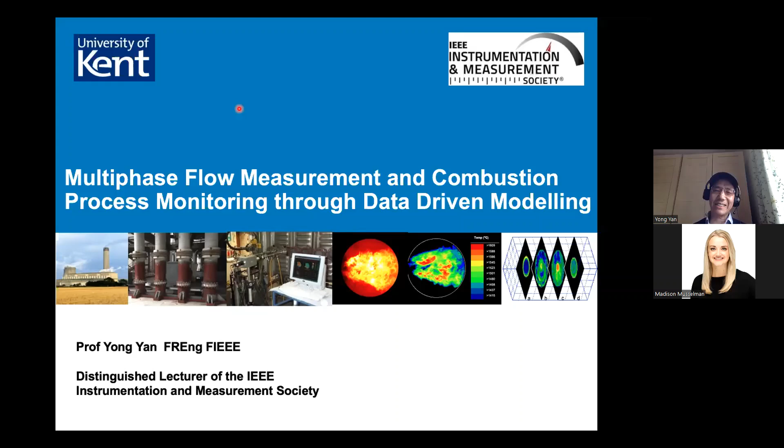Part of that program, I'm asked to speak. The topic is about multiphase flow measurement and combustion process monitoring through data-driven modeling. I would like to share my experience with all of you in conducting research here using this technology.

Now, in the next 40 minutes, I will introduce the basic methodology: how do we use data-driven modeling to achieve measurement and monitoring. I'll use an example I'm quite familiar with, multiphase flow measurement. This measurement is quite difficult, there's no simple solution. Hence, data-driven modeling may offer an approach.

In the meantime, I will also introduce other applications such as leakage detection, and how we predict NOx emissions from combustion processes.

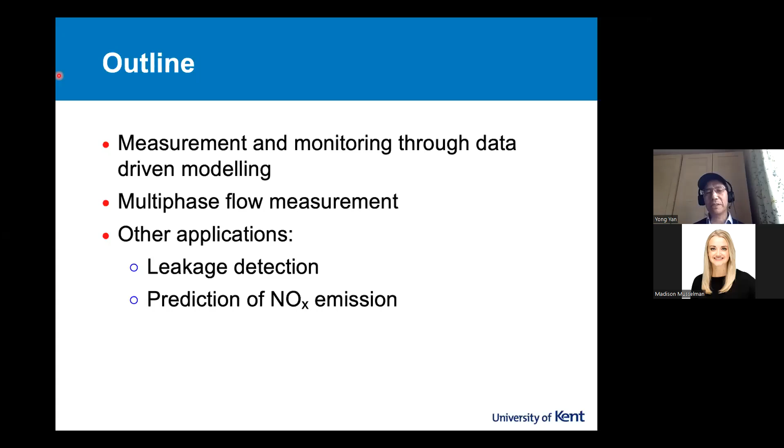Artificial intelligence has impact in many areas of our life and work. So we do research and development in instrumentation measurement, and artificial intelligence obviously has had impact in this area as well.

There's a review article published two years ago in the IEEE Instrumentation Measurement magazine. I extracted this image, as you can see. They call it applied AI methods, which are used across instrumentation measurement in a diverse range of applications. As you can see, people use different terms, but they mean more or less the same thing: various machine learning, deep learning, or evolutionary computation. There's a lot of terms here, and they are related one way or another, in how AI is applied in instrumentation measurement.

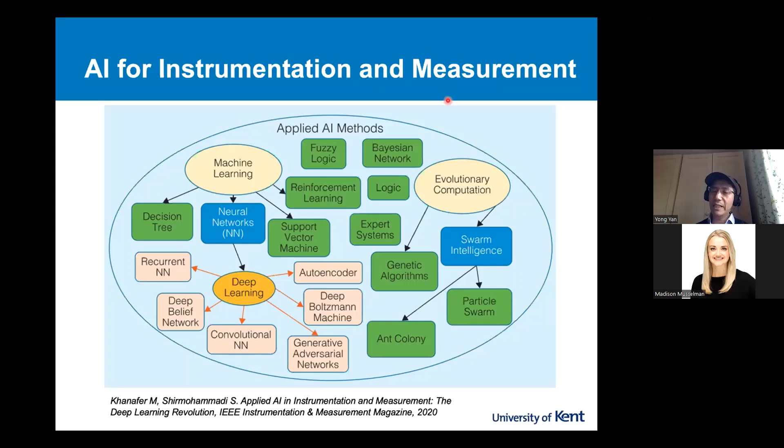So in this topic, I will introduce how AI affected or helped us achieve measurement in multiphase flow metering. To start with, I'd like to introduce this important area of application. It's called

air-oil two-phase flow metering. When we talk about flow, normally it's single phase. Here on this occasion, I'm talking about two-phase. The two-phase here means air-oil. So what is that we're talking about here?

You can see the image here, something you may see if you cross the ferry. You will see a so-called bunker barge. In fact, it's an oil tank which supplies fuel for a ferry, like this on the right. So on the left, the barge is a seller. On the right, the vessel is a buyer of marine fuels.

Okay, so it's oil. The trouble is when you start the so-called filling process—they don't call it filling, they call it bunkering—when you start the process, very often you get air into the system. So throughout this whole bunkering process, there are a lot of chances you get air into the oil, but customers are buying oil, not air bubbles. That's how the bunkering process creates a lot of uncertainties in measurement.

If you look at the diagram on the right-hand side, the seller has a flow meter, the buyer also has a flow meter. Each flow meter tells you how much you receive or you sell. In fact, we have two receipts, one from the buyer, one from the seller. The two receipts are never the same. There's always debate, a dispute. There are some high-profile legal cases in the marine industry.

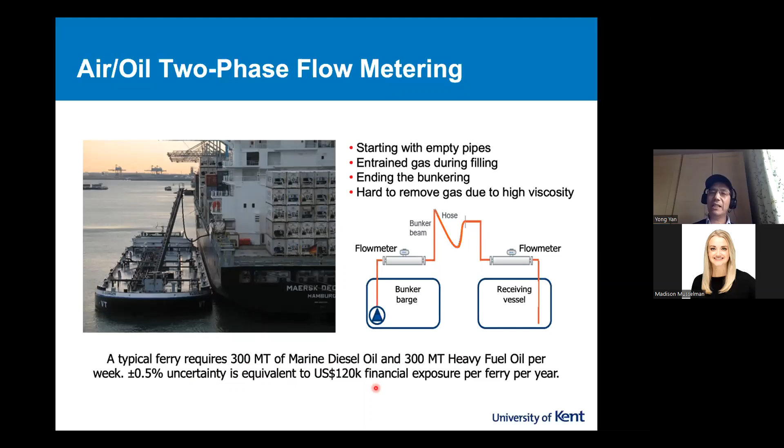So we need to monitor or measure oil flow rate accurately. Here's an example to demonstrate what happened during a bunkering process. The whole process is roughly 1.5 hours. The blue line is the flow rate in kilogram per hour. You see it's steady most of the time, but initially it's uncertain, and during the ending period you can see it go up and down.

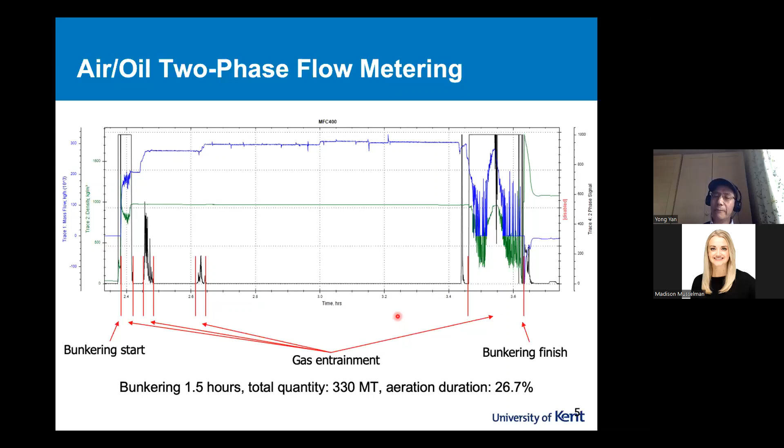The green one is density of oil. It's constant most of the time, but at the beginning and end you can see it's uncertain because air gets into it. The black line indicates air has gotten into the system. In fact, you got 26.7% duration which has air bubbles getting into the system. So the customer is buying oil, not air. So how do we measure oil in mass accurately? It's a challenge. How do you monitor oil accurately in the presence of air bubbles? Ideally, we want to measure mass flow rate, hence total mass.

But most proven flow measurement techniques provide volumetric flow rate, not mass. There are proven flow meters on the market which are based on radiological and nuclear magnetic resonance principles. They're very expensive and not accessible, certainly not suitable for wide uses across marine or similar sectors.

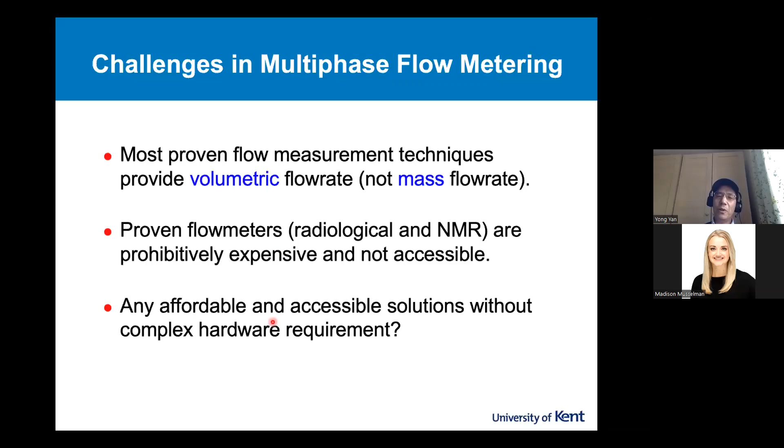So here's a question. Are there any affordable, accessible solutions? Without complex hardware means it has to be cheap enough so people can afford. So what's the option here? And we say, yeah, let's try data-driven modeling, soft computing or machine learning, more or less the same thing here. So we did a quick survey in 2018, that's 4 years ago, and we did a quick search here.

There are a lot of research activities going on in the academic community and industrial sectors. You can see on the left, all sorts of sensors have been used. They're quite cheap, well established, and you can see the methods they used for the data-driven modeling. Mostly artificial neural network, SVM, plus some other more complex ones. And the target you can see: air-oil, quite common, air-water, and so on, even gas-solid.

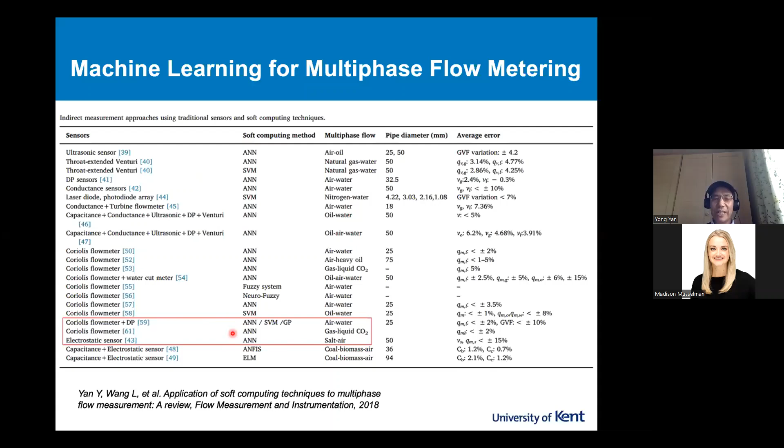And this red box here indicates the papers we published. So my team has been working on this over the past few years, so we have some experience. So our approach is to use Coriolis flow meters to measure two-phase flow. In other words, oil which has air bubbles. How does it work?

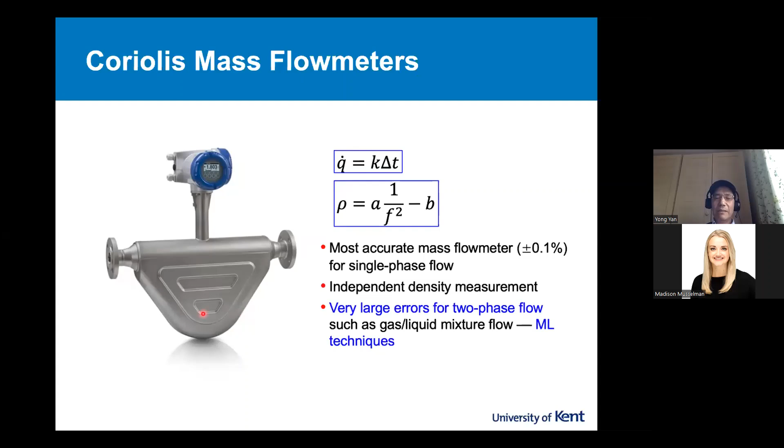If you have any idea about the Coriolis flow meter, it's quite straightforward. The flow comes into the flow tube. The flow tubes are vibrating due to the excitation of the two metal pieces here through control modules. We have upstream and downstream sensors to pick up the signals. Between the two signals there's a phase shift, delta t. From the delta t, we can work out mass flow rate, Q dot. Here it's mass flow rate, not volumetric flow rate.

In the meantime, we can monitor the oscillation frequency of the tubes. The frequency F can be used to determine density of the liquid. Now, this works very well for single phase flow measurement, I mean single phase oil or just gas, within plus minus 0.1% or even better. So it's independent density measurement, that's also helpful.

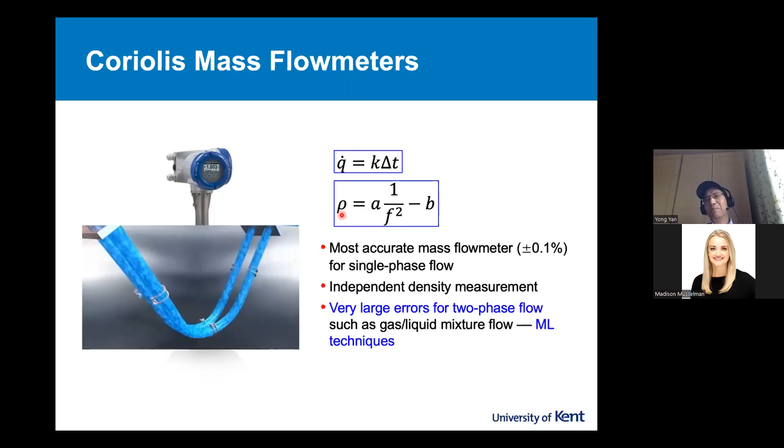The trouble is in real life, in this case, oil has air bubbles. It's air-oil two-phase flow, and the errors you get from the meters are very large. You still get the reading of mass flow rate and the density, but they have very large errors. And the question is, can we somehow minimize errors by applying data-driven modeling techniques without modifying the hardware? Because if you modify the hardware, it costs you money, has manufacturing implications, and will likely increase maintenance requirements.

So the idea is like this. We still get the so-called apparent mass flow rate and the density. We know they are not right, but we have that input anyway. The information is there. We also have temperature, which is embedded in the Coriolis flow meter. We can also include a conventional differential pressure transmitter. It is commonly available, it's not expensive. And that's it. We have data coming into data-driven models.

So it goes through the modeling process. We can predict mass flow rate, hopefully the correct one, a fairly accurate one, and hence the total mass. In addition to the measurement, we also have flow information such as density, even gas volume fraction, so how much air bubbles are in the oil, even impurities in the fluid.

So the trouble is when you have a model built offline, then you use it for online in situ continuous measurement. So ideally we need to do in situ training from time to time to enhance the performance of data-driven models, which were established before we do the installation.

In our case, we are also developing analytical models of gas-liquid two-phase flow. This information can be incorporated in the modeling, again to enhance performance of data-driven models. So this is the whole methodology, how we deploy data-driven modeling techniques to achieve gas-liquid flow measurement.

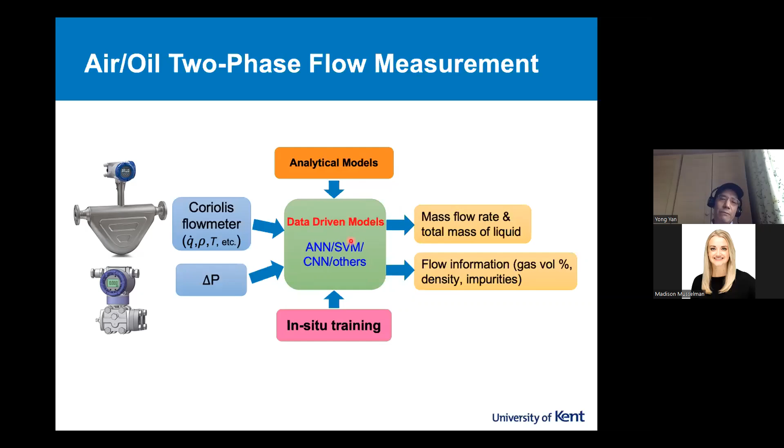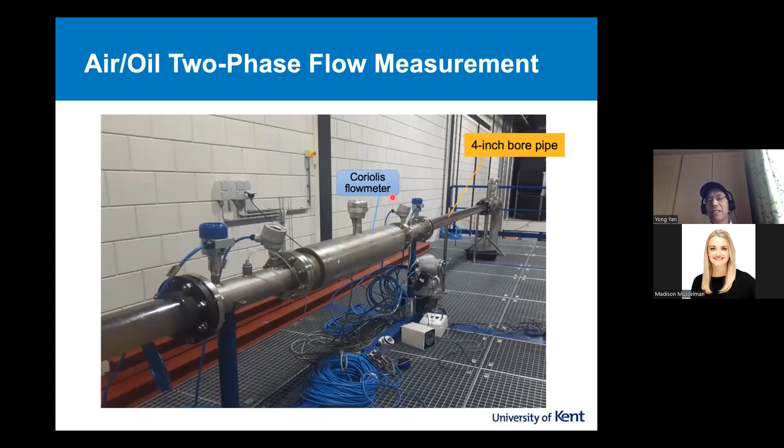This video shows you, if we do have air bubbles in oil, what happens. So you've got a very long and large air bubble, and we have tiny ones. We are not interested in this distribution. We want to measure accurately the mass flow rate of oil. So we have done a lot of work in this.

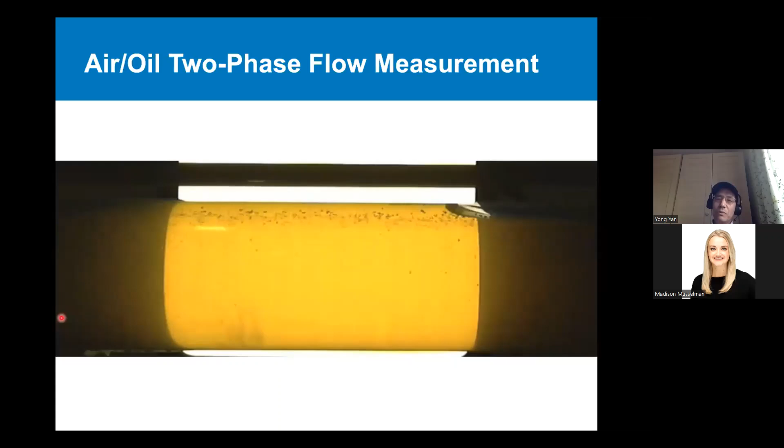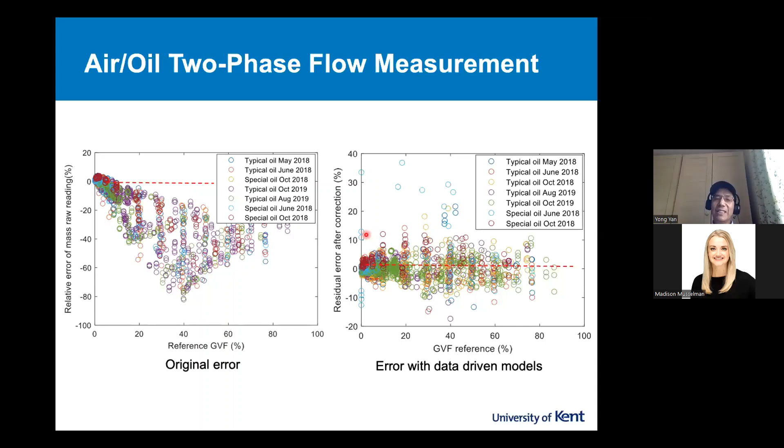Okay, so we have tested the systems with different oils, typical oils, special oils. For commercial reasons, I'm not able to tell you what oil exactly. Okay, but the message is there. So the data-driven models have helped us to improve the accuracy of oil flow measurement in the presence of air.

So tests with oil are always costly, inconvenient, sometimes even high risk. We often do research with air-water flow. You can see in the horizontal pipe and vertical pipe situations, without deploying the established data-driven models, again, you get the mass flow rate either under-reading or over-reading. It depends on the liquid flow rate, and also depends on the volume fraction, so how much air is in the liquid.

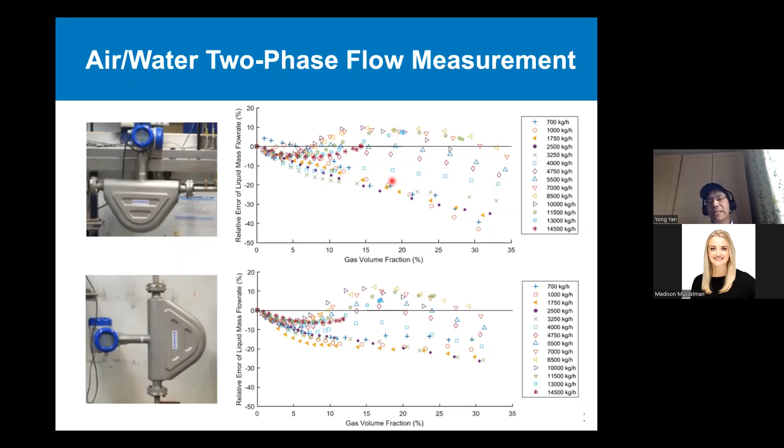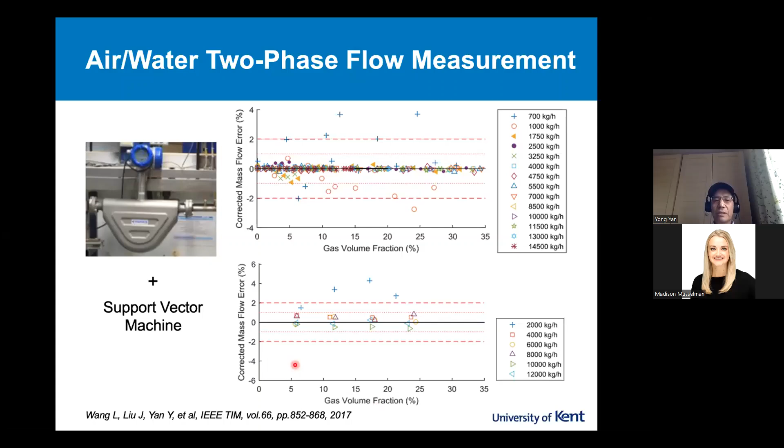Okay, we published results in this paper 5 years ago. If you are interested, you can refer to this paper.

Let's move to an entirely different sector. This is carbon capture and storage. Okay, CCS. Carbon capture and storage has become increasingly important because we're trying to minimize harmful emissions of CO2 to the atmosphere. We want to capture CO2, as you can see in the diagram. After capture, you transport CO2, hopefully in liquid form, towards the storage site, which is a depleted oil or gas field. So we hope CO2 stays there for whatever years, then that's it. So that's the whole idea.

The trouble is the CO2 in a transportation pipeline could be in gas form, in other words, gas CO2, could be liquid, could be a gas-liquid two-phase mixture, or even supercritical form. So the CO2 flow itself depends on the temperature and pressure of the transportation pipeline. So for all the good reasons, we need to measure the mass flow rate of CO2. This is mass flow rate, okay, not gas phase. So again, for trading, for accounting, for regulation purposes.

So here's an example. Imagine there's a power plant which emits 20 million tons of CO2 per year. A 1% uncertainty can result in 20 million euros financial exposure. CO2 costs have gone up a lot over the past few years. It's roughly almost 100 euros per ton. This is February this year. So that makes CO2 flow metering more worthwhile, because of the demand.

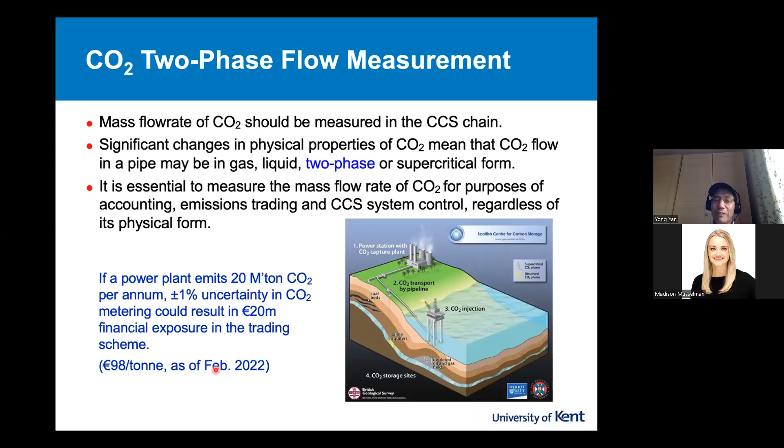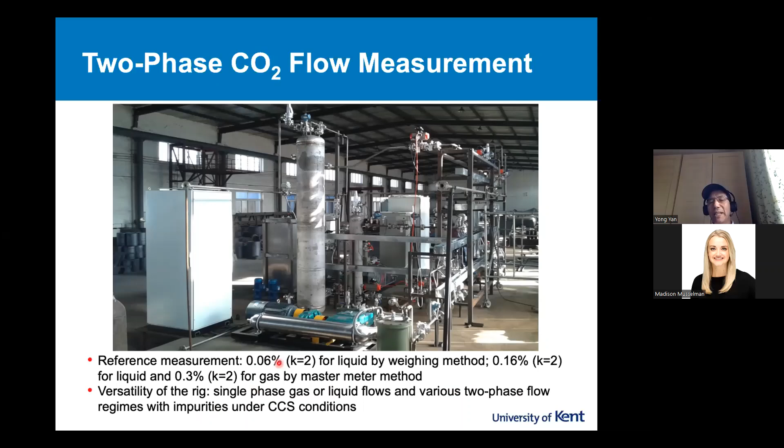The trouble with CO2 flow measurement under CCS conditions is that we need a platform. To establish such a platform is not easy. We spent a lot of energy and money to build this. So this is a 1-inch CO2 flow test platform under CCS conditions. On this test rig, you can create gas CO2, liquid CO2, or gas-liquid two-phase CO2. We can even add impurities into the system to test the impact of impurities on the flow measurement and so on. We have a weighing method to offer a quite accurate reference for flow meters under test. We also have master meters, again, for evaluation purposes. So this should give you some idea.

I have a video clip to show, just a moment, if I can show that. You can see the last one.

The idea is very simple. So we fix, more or less, the gas volume fraction, the same quantity of gas CO2. Then we change the flow rate. So it's two-phase. You can see the bubbles here on the top, at low flow rate. Then it's partially stratified. Then fully turbulent flow. Again, this shows you what happens in CO2 flow pipelines, the flow regime in this horizontal pipe. Again, we want to measure mass flow rate without actually quantifying the exact flow patterns.

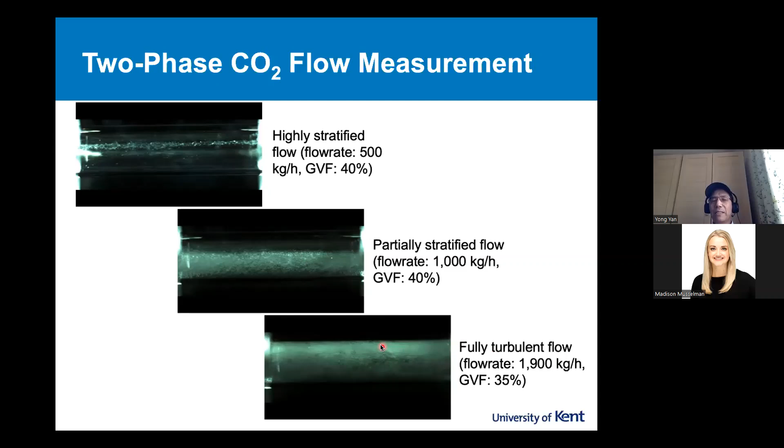So here's the setup. This is the Coriolis flow meter under test. This is the weighing column, which offers our reference. Okay, so that's that.

This is the test we conducted on the vertical test section. On the left are the errors of mass flow rate from the Coriolis flow meter without the data-driven models. On the right-hand side, after applying the models, the errors are much smaller, mostly within plus/minus 1.5%. This error is quite acceptable to the CCS industry. We can also measure gas volume fraction, within plus/minus 10%.

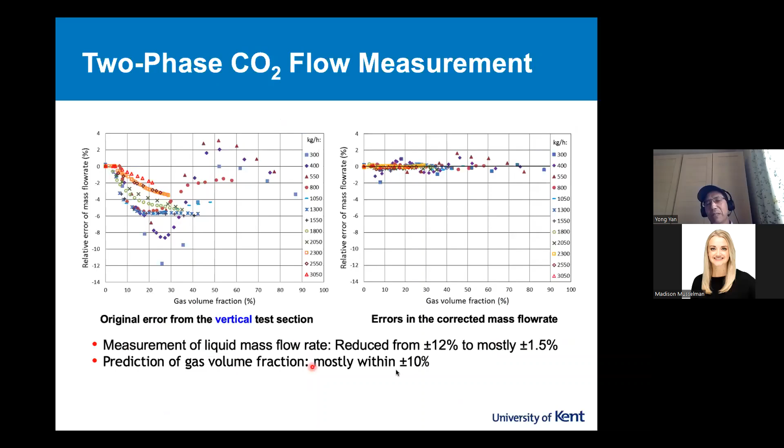So this is the vertical test section. For the horizontal one, it's similar. You can see in the original, the errors go all over the place. After data-driven modeling, we improved quite a lot. Again, in most cases, it's plus/minus 1.5%. We have published the results in this paper in the International Journal of Greenhouse Gas Control, three or 4 years ago.

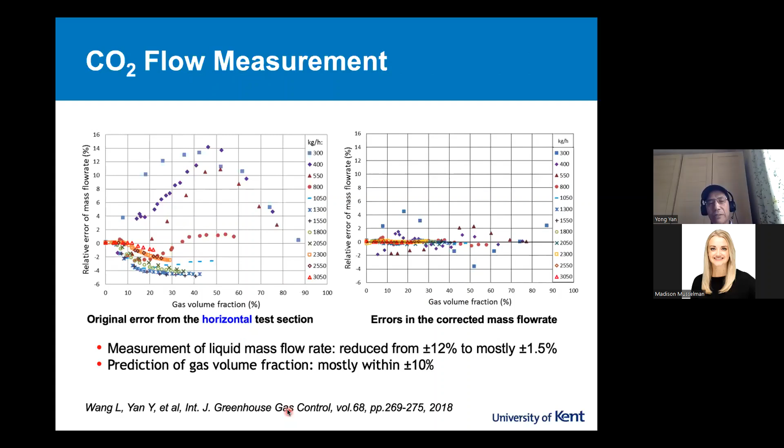I'm trying to show this video here. You can see it. Apologies, I'm not able to click the video clip here.

In fact, it shows a transient process during a startup of a CCS process. Initially it's gas phase CO2, then liquid CO2 comes from left to right. In the power industry, CCS is quite dynamic. The CO2 flow starts in gas form, then liquid, so you get a lot of transient processes. How do we monitor this? It's not easy. So that's the whole idea.

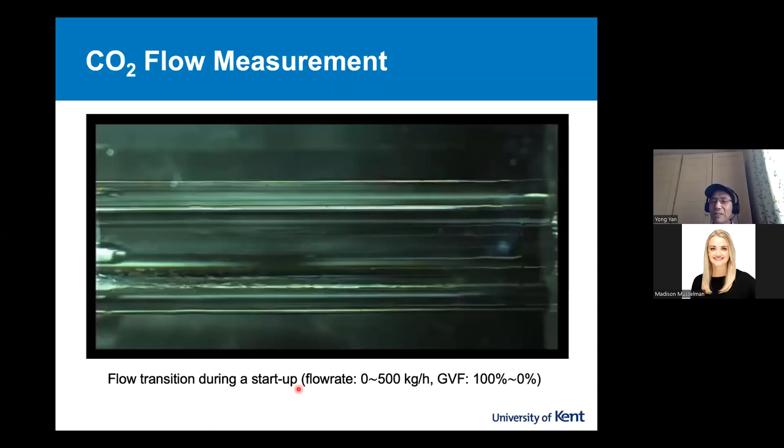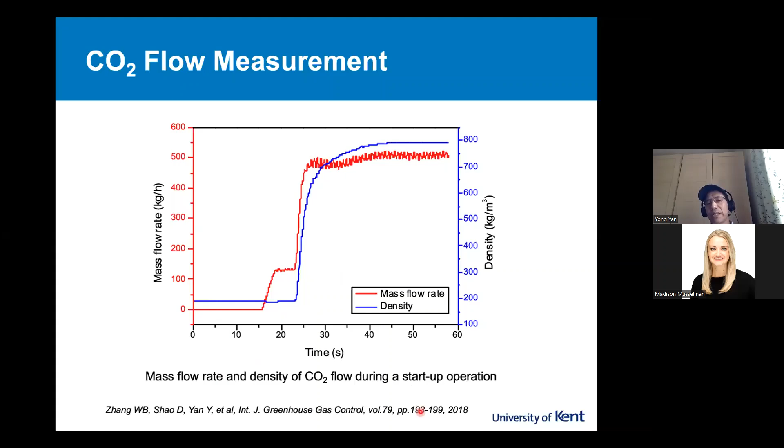I have that video clip; unfortunately, you can't see it. You can see the mass flow rate step increase, stage 1, step increase, stage 2, and the density change as well. So this is a transient process, and we want to monitor the flow rate of CO2 under such dynamic conditions. We have done a lot of tests and the results are quite encouraging. It's published work; if you are interested, you can refer to these publications.

Then we move to an entirely different sector: gas-solid, which we call air-solid flow measurement. In this pipe is a mixture of gas and solid. We want to measure the mass flow rate of solid, not air. So we use a circular electrode, which we call electrostatic sensors, and also curved electrodes; you can see the arrays. Plus a differential pressure transducer, because of the air in it, we want to know how the pressure changes in relation to flow conditions.

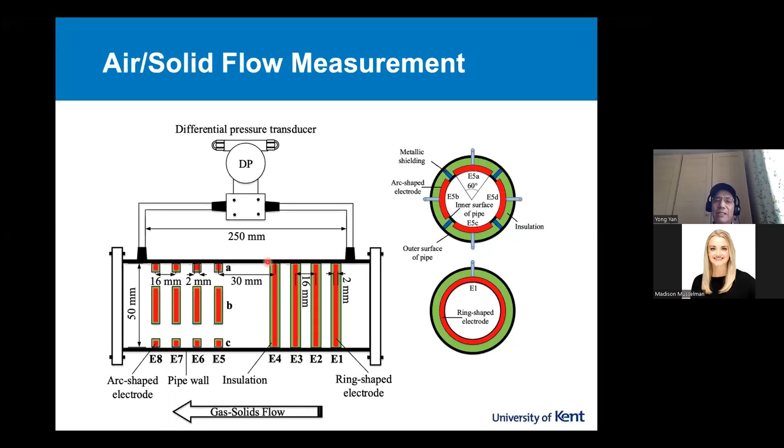The sensing unit is very different from other multiphase flows. We have a circular-shaped electrode, arc-shaped electrode, and differential pressure. Then we go through a signal processing stage, and deploy a neural network, support vector machine, and convolutional neural network to get the mass flow rate of solids. We have been doing this research for some years, all conventional, but we have attempted to use data-driven models to see if it's better.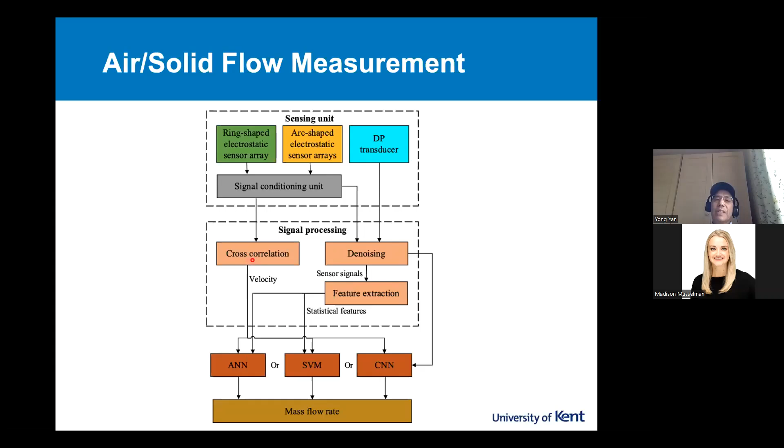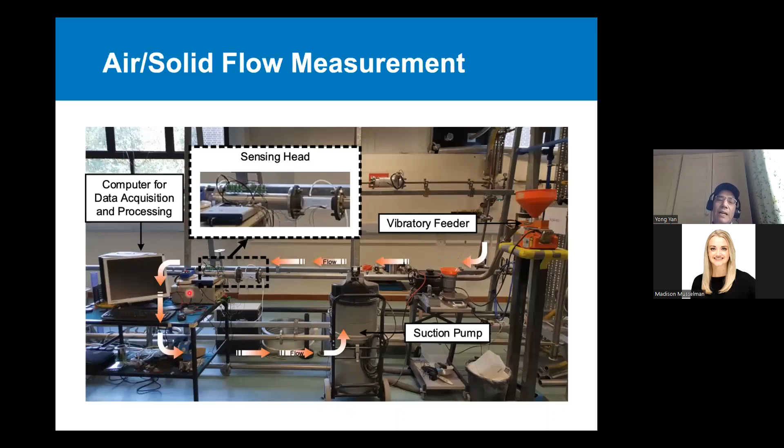This is a test rig in our lab. Particles come in from the right-hand side, go through the test section, eventually going to a suction pump. You can see the flow meter here; it's a 2-inch pipe. The electronics and computer are on the left-hand side. We have tried to use the SVM model and the CNN model. On this occasion, both are on the horizontal test section.

Details of results are published in this IEEE TIM paper; if you're interested, you can refer to that paper. We feel quite encouraged by the method. The hardware is already there. We have done a lot of traditional conventional research, but now we just add models, and the performance is indeed improved, to some extent.

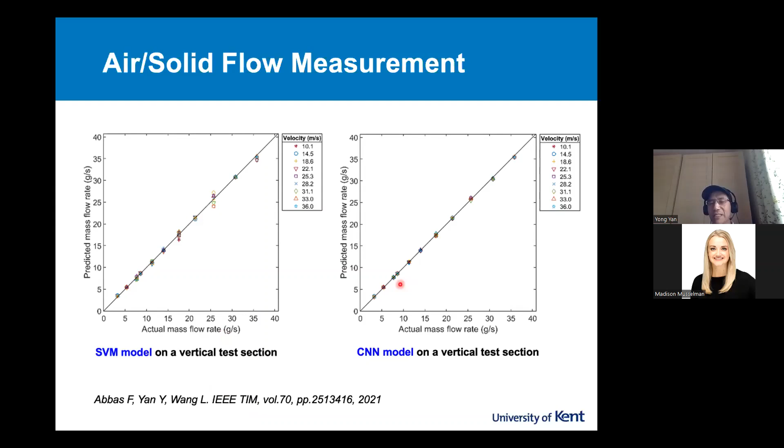The last bit is about leakage. It's difficult to capture CO2 from a process, then it goes through some 100 kilometers of transportation, and that CO2 could leak. So there's a demand: how do we detect any leakage, and what's the leakage rate? Sometimes the CO2 pipeline also has impurities, such as nitrogen. Do we know how much impurity is in it?

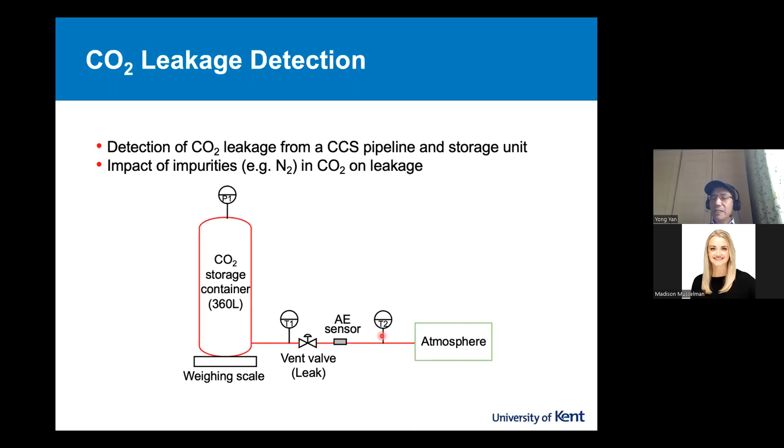Again, on the test rig presented earlier, we have this storage column. We can weigh the mass, so we have a reference of how much mass is lost per unit of time, a reference leakage rate. We have used acoustic emission sensors plus a thermometer to monitor the leak rate. Here's the reference column and the actual setup. You can see the low-cost acoustic emission sensor and a temperature sensor. And we can create different leak conditions.

We tested the methodology just like flow measurement. We deploy data-driven models and extract features from acoustic emission signals in the time domain and frequency domain. We also incorporate the temperature output, and all this information is combined as input to the data-driven models, so we can predict leak rate and even the volume fraction of impurities, if any.

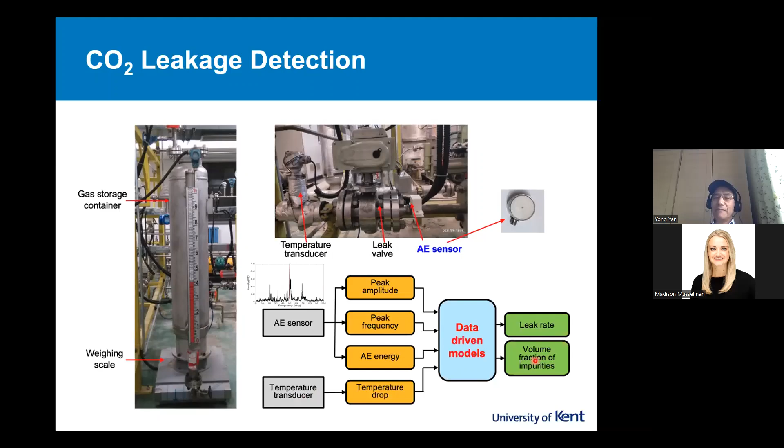Here's a typical result. Here you can see the measured leak rate. We have relative errors here. It's quite good, plus or minus 3% in most cases. We even achieved quite accurate prediction of nitrogen impurity volume. You can see again, it's surprisingly good. We are still working in this area, so the results are to be reported in future. We feel the potential is there.

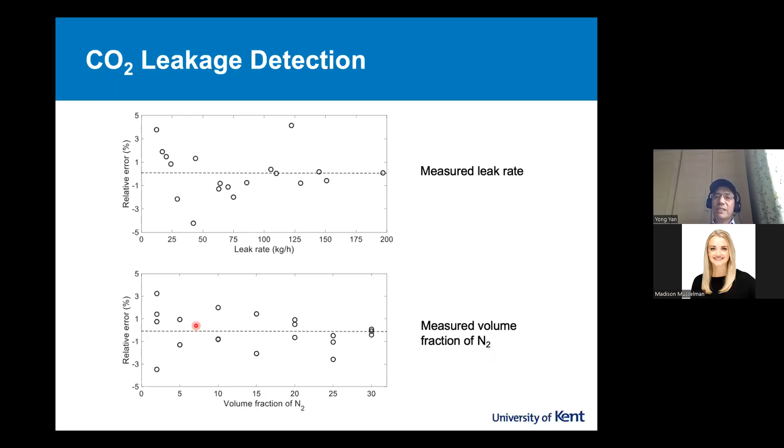The last bit is about how we use data-driven models to achieve combustion process monitoring. About 10 years ago, we started to try this approach. We have this EMCCD camera, you can see on the left, plus a spectrometer. Again, that's small, miniature and quite low cost. So we have this radical image from a combustion burner flame. We have flame temperature information from the spectrometer.

Again, we extract all the features. Then we feed such features into data-driven models. So we are able to predict a so-called equivalence ratio. This is an important indicator of the combustion quality. You can see it's quite a good prediction here. In the meantime, we can even predict NOx, how much NOx is emitted from the combustion process. Again, this is surprisingly good, with very basic data-driven models.

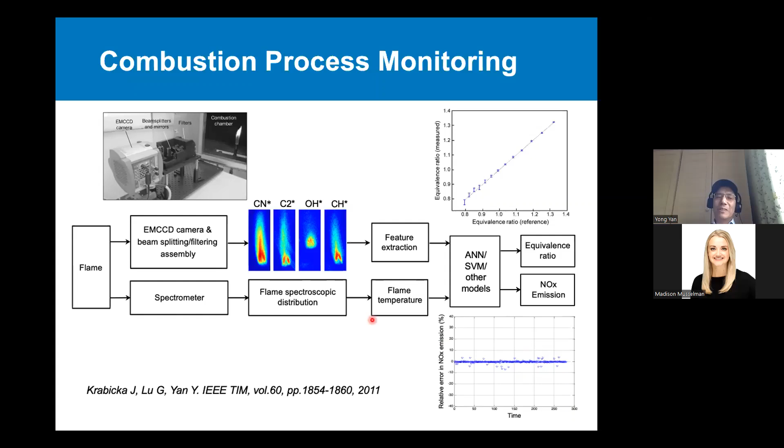So that's 10 years ago. And since then, we've worked on and on this. We're trying to improve the sensor and improve the data-driven models. In the past 2 or 3 years, we did a lot of tests on an industrial scale combustion test plant. It's quite large in scale, very difficult to do, and it costs a lot to do such tests. This is a downwards burner. The flame here is facing downwards. On this occasion, we have biomass fuel, and we have tried different fuels here.

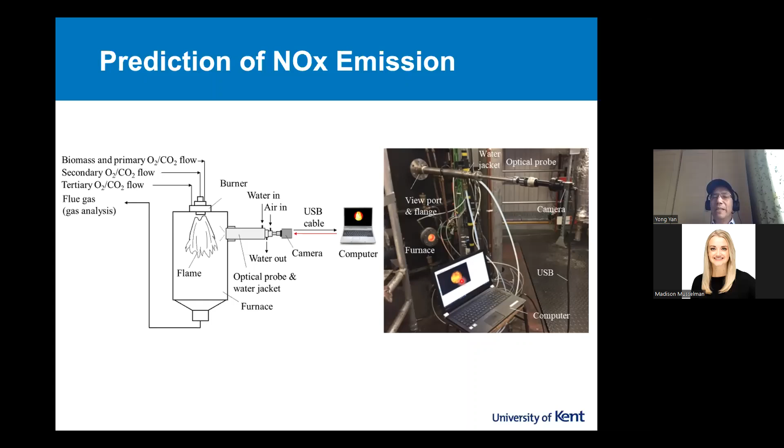So you have an imaging system, which gives us the images here. This imaging can be used to derive a lot of information for our measurement purposes. For example, from the images on the top, we can measure temperature profiles. The temperature profiles have a close correlation with NOx emissions. So once we have a temperature distribution, we feed such information into data-driven models. We use the data set we collected to train the model so we can predict NOx.

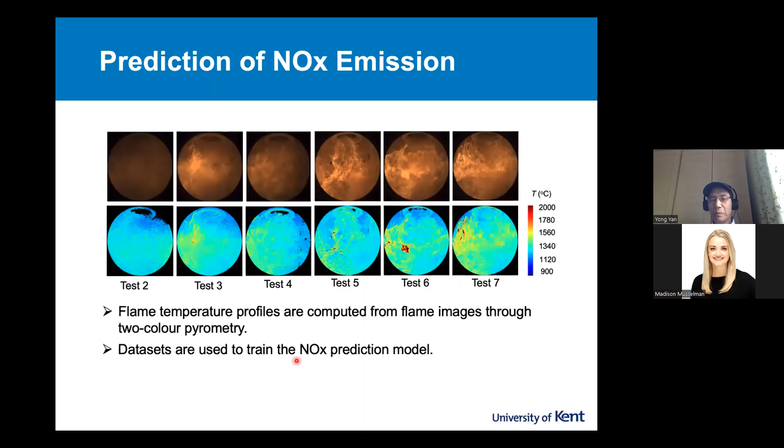So then most recently, we have made more progress applying so-called CNN models to achieve online deep learning performance. In other words, we don't just develop an offline model, we test it under online conditions. So our idea is to develop a model, and also retrain the model by incorporating new incoming data. So it's kind of like in situ training, constant improvement of the models we established earlier. This is important to maintain the performance of previously trained models under real combustion conditions.

So the data again we obtained is very encouraging. The details are published, again, in this TIM journal. Again, my time is limited here. So if you're interested to study this, this gives you some idea how we achieve so-called online deep learning by incorporating new data.

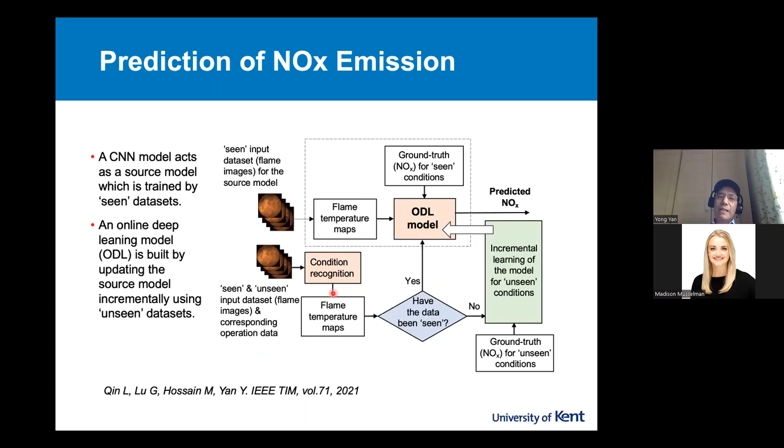Finally, we are working in the same area here. We're trying to deploy data-driven models across the whole combustion plant. Now, a conventional combustion plant produces electric power 24/7, non-stop. But now in the modern power industry, they have a very complex power grid, which has a lot of energy sources, conventional, renewables, with constant optimization. So the power plant has to be operated in a flexible way. You expect frequent start-stop of a 600 megawatt power plant, or constant load change, 300 megawatt, maybe 400 megawatt, then coming back again. And the fuel is not just one fixed biomass, it could be different biomass, could be coal, could be oil. So the fuel diet is constantly changing.

All this creates so-called flexible operation conditions. They call that a smart power plant. All these variations create demand for modern measurement systems. How do we make sure the combustion process is optimized constantly, regardless of the changes in load, in fuel diet, or starting again after a short period of time? So all this is quite a challenge for people like us, like my team. How do we help the power industry achieve constant optimization?

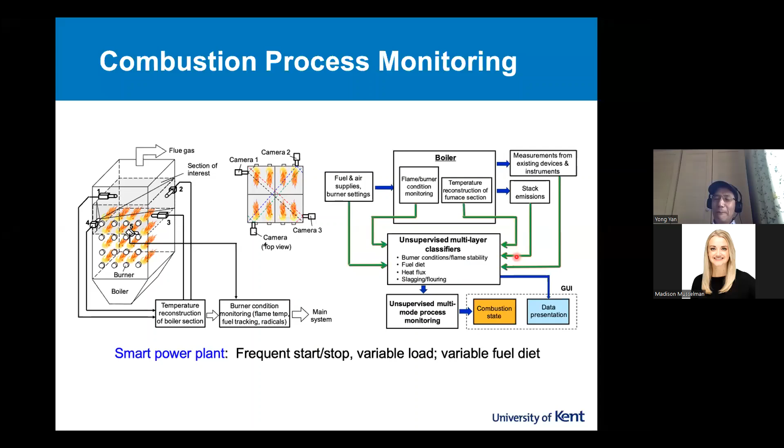So the idea is trying to achieve constant optimization despite conditions changing. Okay, that's the whole idea. So results are to be reported in future.

Okay. There are some important questions when we talk about how we deploy data-driven models in the field of instrumentation and measurement. So is the data-driven approach really necessary? Do we have to use it? Okay. This question is very common every time I give a lecture like this.

And sometimes, if the measurement problem is quite straightforward and the conventional method is good enough, you don't need to use a data-driven model. It's an overkill, in my opinion. But in the examples I have presented, there are no easy solutions.

Okay, so data-driven modeling has helped us to achieve things we couldn't do in the past, without too much increase in cost. So in my opinion, this approach is very good to resolve challenging, difficult measurement problems. If something is easily done through conventional methods such as cross correlation, image correlation, or other methods, you don't need to do data modeling.

Another question is, are the models we established under lab conditions transportable from a test rig to a plant? Yes, valid question. I think it depends. If the test rig is able to recreate all the conditions we are going to test in a real plant, that's okay. If not, then that's a different case.

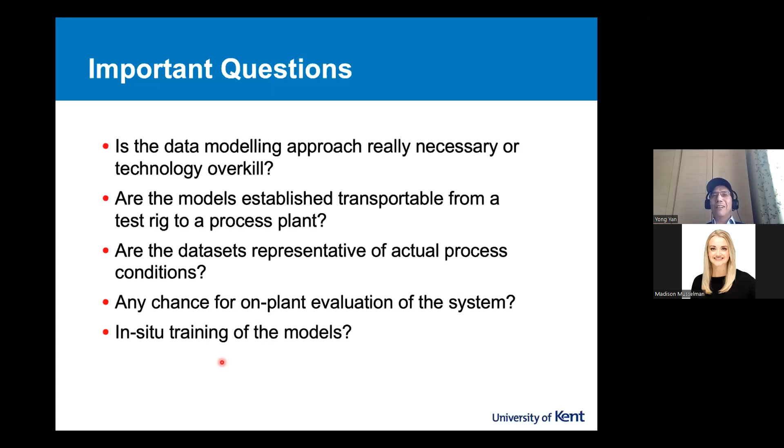So here are my concluding remarks. I'd like to summarize by saying that data-driven models have been deployed successfully in some cases. As I have presented, the models we have developed are mostly artificial neural networks, support vector machines, CNN, or their variants, and lots of combinations. They give really good performance.

I can only say I'm familiar with multiphase flow, combustion process monitoring, or even leak detection. But the potential is, if you can deploy the same approach in other industrial sectors, why not? I know some are being researched, but some are still premature. Further work is to be done to explore how good this data-driven modeling approach is for other applications.